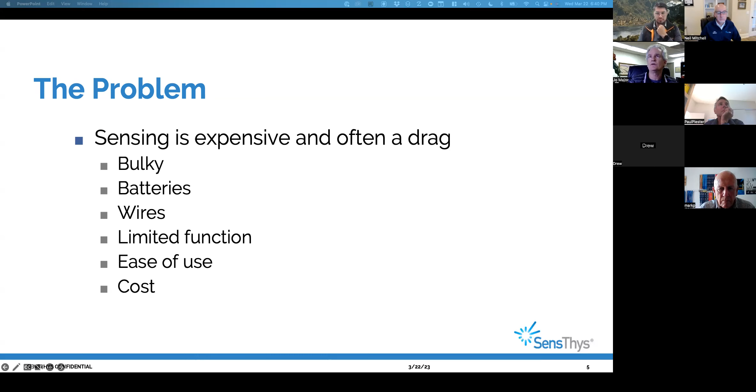So, if you paint the picture of an ideal sensor, what would it look like? A bunch of us are familiar with RFID, but if you ask what an ideal sensor looks like for these solutions, you'd say: I don't want wires going everywhere, I don't want batteries because they run out and are bulky, I want something very small, ideally so small and ultra thin that I can place it within layers of different materials. I don't want to maintain it, I want to detect it remotely and wirelessly, I want it automated, and I want it to be really economic.

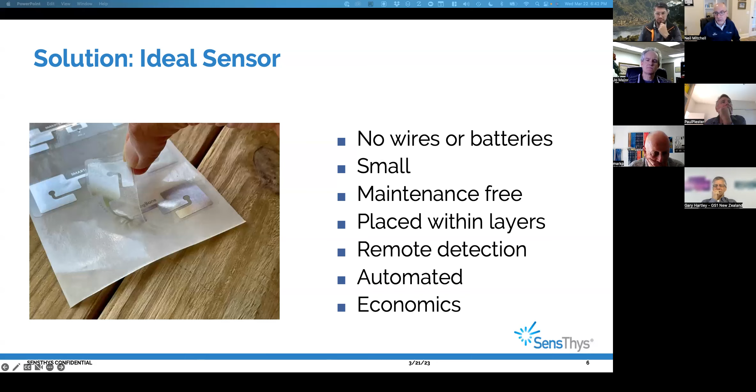I want these sensors to be the opposite of the $1,000 statement that Joe just made, I want it to be a few bucks perhaps. And that's where we are with these types of sensors. You can see an example of one in the image there.

We're going to talk about supply chain, and you may think, why are they pitching us sensors, why do we have to think about the supply chain? The reason is the supply chain is really good at making low-cost RFID tags, but it isn't so good if you say the medium I'm in is a high dielectric constant with a loss tangent of X, and that changes to a different dielectric constant and loss tangent during the process, and I need to operate in that environment. Those kinds of statements are outside of what the industry normally does. When we walk you through this, we'll give you a feeling for how those problems come up and how we help you solve them.

So over to you, Neil.

Let's talk through what one of these sensors looks like and what's constructed within them. The first thing is there's a semiconductor component on there, the IC or the die, there's many different names for it, but this little chip sits in the middle of this RFID structure. It's part of the intelligence that makes up this end solution. There's a lot of smarts in the chip, but also in how this thing is designed and put together. There's multiple antennas attached to this in reality, but as you can see, the chip is really, really small. We'll hold one up here so you can see it. You won't be able to see the chip in it because it's way too small, but this is basically one of the sensors we're talking about.

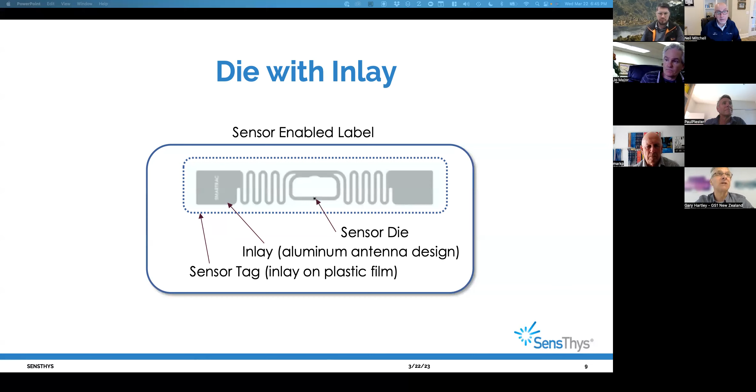Then the next step, after you see the aluminum antenna, is to put it into a label or at least into a protective structure, something you'd apply into your system. Often we're talking about something where you want printing on it, you may want a barcode on it.

You would probably want it in a few layers. Do you want it white? What kind of structure do you want it on? Do you want it rolled or in sheets? Which way do you want it to unwind? There's a whole complicated array of questions that come with how these things are provided. We can certainly help you with that. It's not rocket science, I would like to say, but there's a hell of a lot of details, and we can certainly help you through that.

But in addition to the label you see there on the top left, there are other different formats these tags can come in, these sensors can come in. Another flavor is one designed more for going onto metals. You can see from the look of this one it's a little bit thicker, with some other additional material involved. There are different flavors of that.

If you apply that onto a metal in, say, a vehicle, maybe now we want to get moisture wicked to it or transported to it, so this RFID sensor can do its thing. So now you're talking about attaching a wick tail in order to draw water towards it. Again, that's something we've been involved in, defining what that wick looks like.

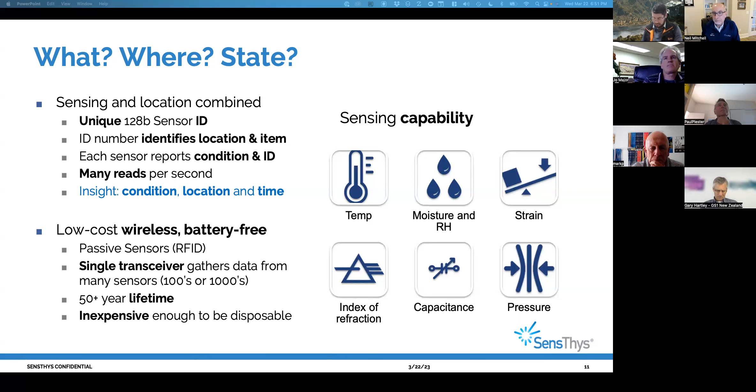We don't need to do that. Basically, you can put as many of these things in and you can read 100, 1,000, or 10,000 of them.

So it's important that we understand with our customers, or help our customers understand how to think about this capability. We've worked with Asygn in particular very closely to help customers understand where things are and what is required to go from where that is into a full application.

Axzon has been around for much longer. They do have things in production, which means we can get you tags and they're reasonably priced and they work - temperature, moisture, and strain sensors. If the inlay of one of those doesn't work in the application, which happens fairly often, then we have to go back to stage number 4 and make a proto label, then make the samples and get into production.

Asygn is a younger company, very, very capable, a lot of fun to work with, much broader. The physics of the device gives them more opportunities to sense different things. So you can read that list. Temperature tags are in pretty good shape - you can buy them, they're entering prime time.

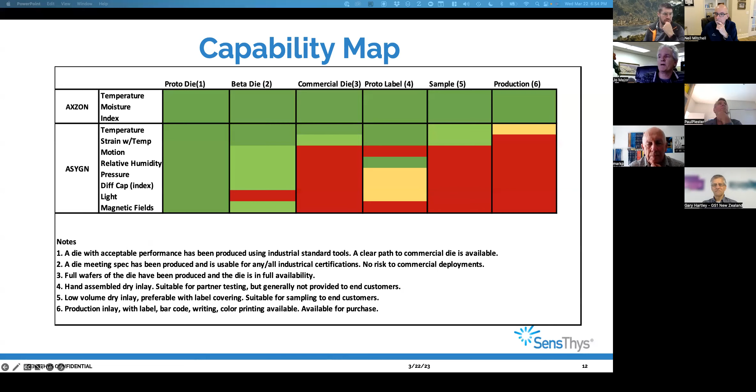So on the software side, Neil's going to speak about PhySens. That's the sensor program that we use for sensors, but there's a series of applications that come with the hardware that you buy. ProSense is a broad-featured reader management tool. PhySens is really dedicated to sensors. It can do all kinds of brilliant things, like it can actually figure out whose sensor it is and what kind of sensor it is and do all the calibration for it.

It's great. A command center probably doesn't interest anybody here - that's if you have 75 readers in a facility and you want to manage them from a single point. AutoSense is a very nice automated reader management tool - you basically tell the reader what to do when it wakes up and goes to work. I'm not going to spend a whole lot of time on performance or the SDKs.

You can always call us about those things. We've always taken security very seriously, and we're not going to talk about it, but it's pretty easy to show that these readers, we think, are the most secure readers that you can buy on the planet. I'll turn it over to Neil next to talk about PhySens.

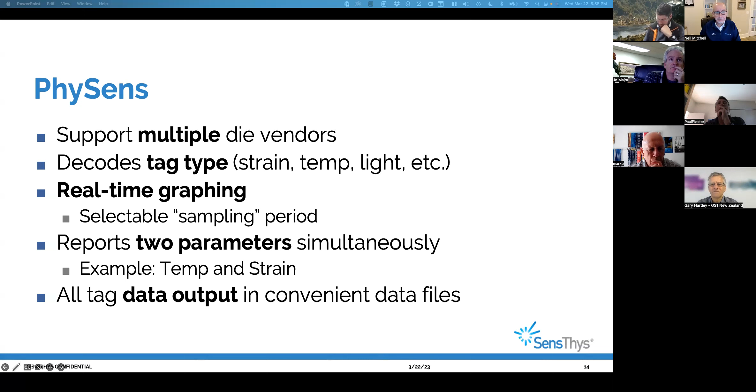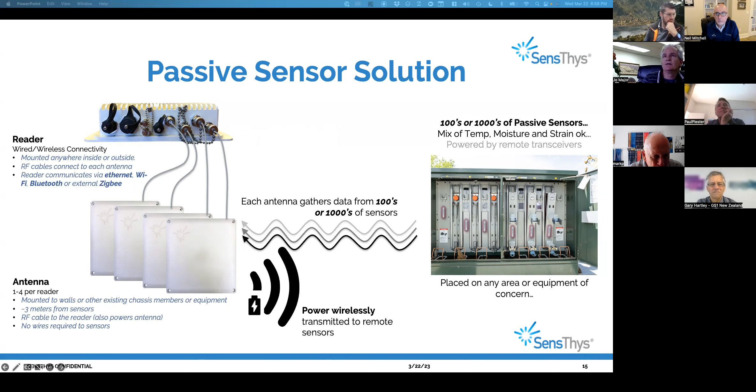So I think next. So, yeah, what we're going to do now, these are literally just 1 minute videos each, and we've got a couple of them. This one here is SensThys in operation, and we're actually going to run it and show you what happens as we measure water and heat.

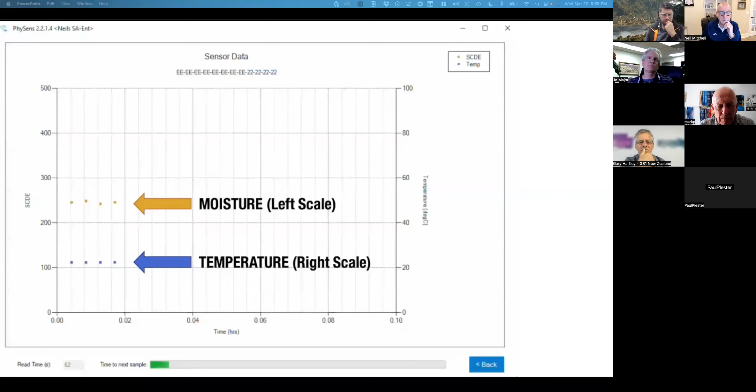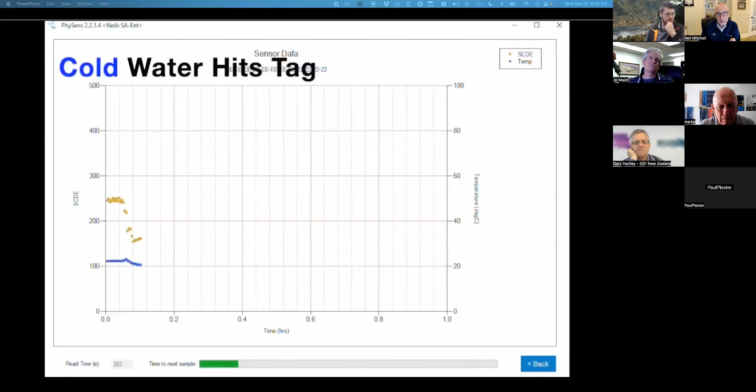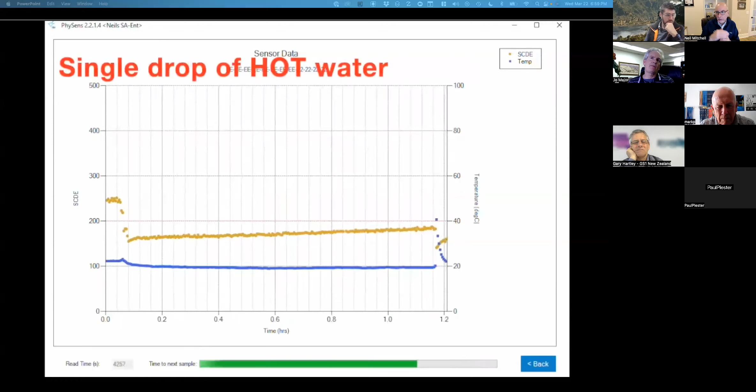So at the top we have in orange the moisture reading, and then the blue is temperature. Every 15 seconds in this case we're reading. And then something's happened there, moisture has been detected. This tool basically resizes the chart for you. So now we're starting to see a very slow increase in that moisture level, and then all of a sudden it's going down again, and something's happened to the temperature.

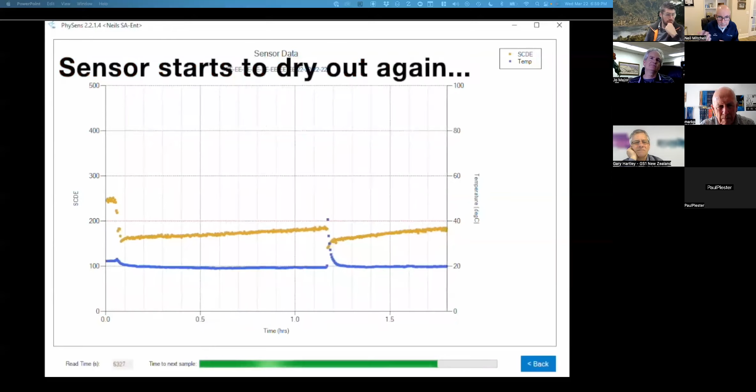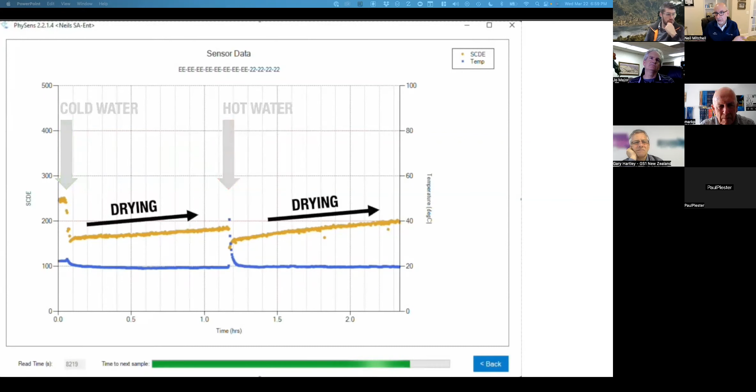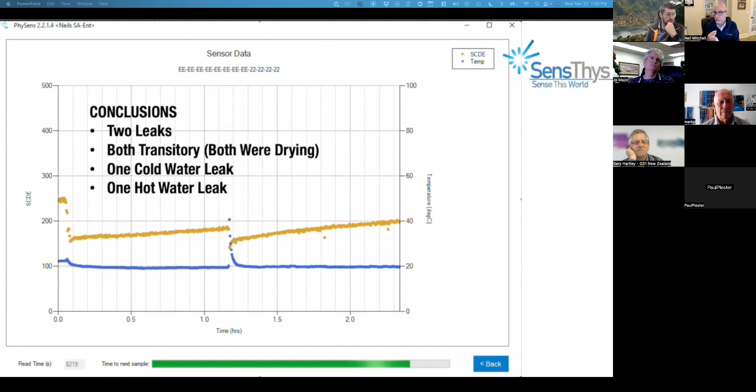It's gone, you see the blue line there, it's gone from 20 centigrade to 40 odd centigrade there. So you can see there what's happened: one drop of cold water, one drop of hot water landed on these things. They were drying out. You can see the temperature of that water. You can see when it happened. So all of a sudden, you know immediately from looking at this data, there were 2 leaks. They were both transitory. One was a cold water drop, one was a hot water drop. You know that all just from that information already.

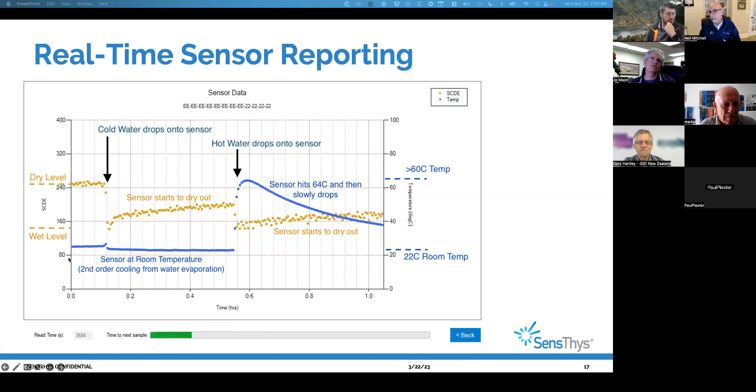So this is another view of it. This is one we captured earlier and annotated to make it a little bit easier to see. We'll give you access to this presentation material so you can see it afterwards. I won't go through the whole thing because it's basically what you just saw. But you can see here the dry level, the wet level, the difference here, and the big spike in temperature here. That's pretty much what you just saw. On the right-hand side here we have the temperature in centigrade, and then on the left side there's basically a special code value representative of the other thing you're measuring.

And then one more we'll show here, which is the strain. So here I'm basically taking one of the strain tags, I put it on the business card, and I'm bending the business card in 2 different dimensions and at 2 different extremes.

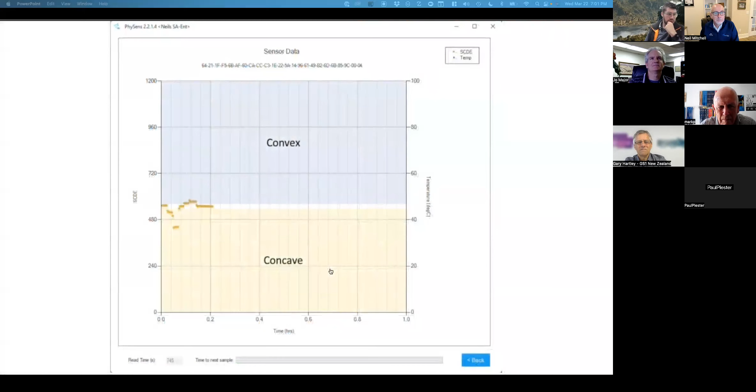One comment on that particular video, that was actually done with an uncalibrated early prototype. So what you'll see is that those things can be made more extreme. You'll see that a little bit better in future, or you will now.

One comment about the strain tag, we were having a lot of fun with that strain tag. Of course, that strain tag, when you put it into its application, fails, and it has to be adapted to work in the real world. Okay, we're going to show you, this will explain itself. I'll talk as it goes. Hit it, Neil.

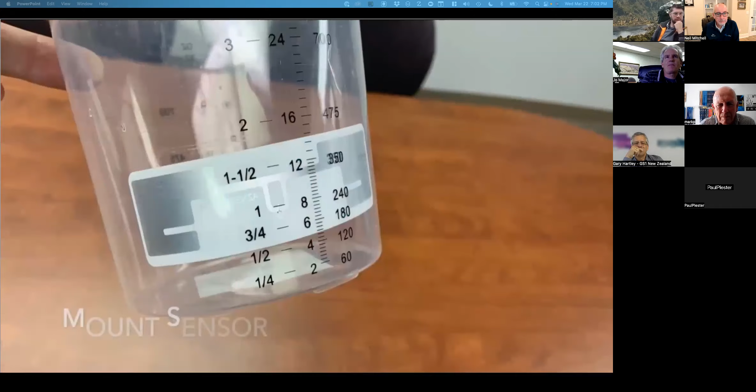So there's a sensor in a simple plastic cup. The reader here, I don't know how far away it is, probably 3 meters away.

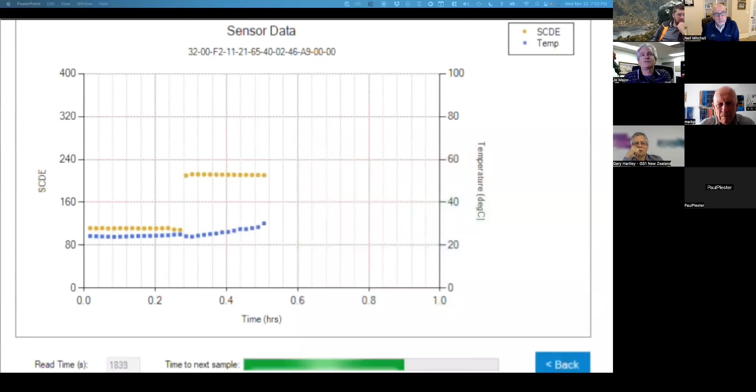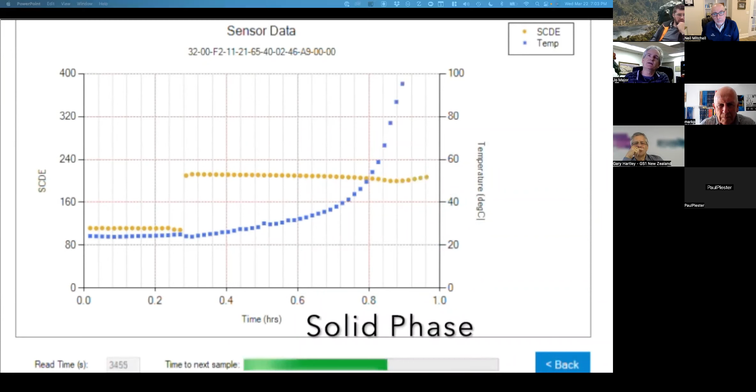There's the baseline. We're going to add epoxy and directly measure how exothermic it is, and directly measure when it flips from the liquid state of cure to the solid state of cure. And as time goes along, the point where it flips to solid becomes very clear.

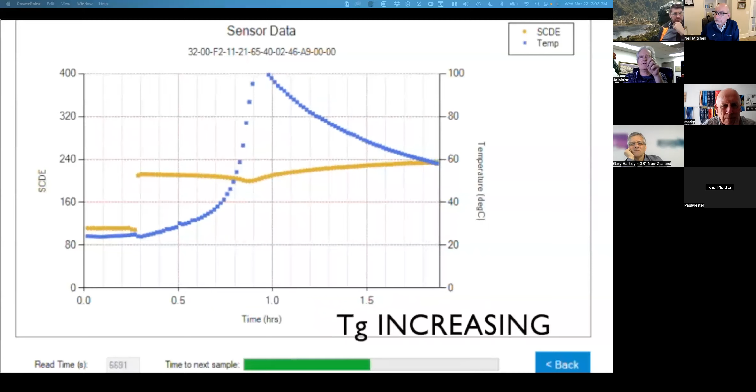The chemistry of epoxy was first really mapped with interdigitated capacitance sensors in the 60s and 70s, and this is in effect mimicking that. Instead of having wires and a lot of bizarre stuff, it does it at a very low cost point.

But it actually tracks the flipping of this - if you've worked with epoxies, they're sort of like honey, real thick and viscous. Then all of a sudden they kind of get hard. That's the part where it gets hard, that's flipping into the solid state phase of cure.

We also track the max temp and when the max temp occurs. If we're doing that for epoxies, just looking at raw chemistries, we can actually see differences between various epoxies, and we can detect incorrect epoxy mix ratios. Finally, as that orange trace goes up, you can estimate how far along it is in its cure process.

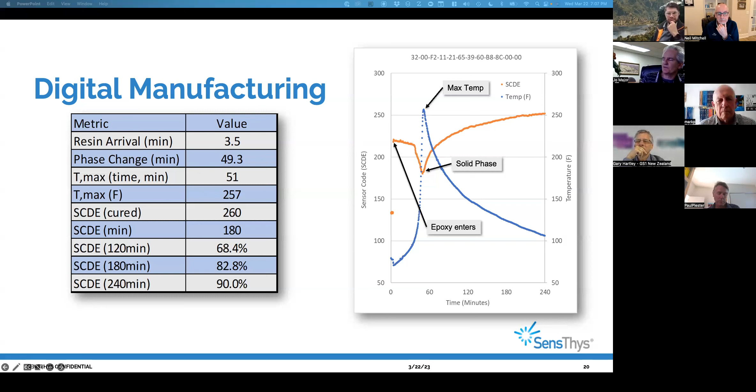Next, we're going to whiz through some of these, but we just wanted to give you a little taste of some of the varied applications that we're seeing with some of these passive sensors.

Basically, these passive sensors are actually buried inside of these layers of the gypsum material. We're able to just take this cart, move it over the roof, and this particular reader has GPS built into it, so we basically end up with a moisture map of the building, of the roof.

And in this testing that we did at a company in the south here in the States, we actually found 3 leaks in their roof they didn't even know about.

In an effort to go faster, machinery needs to make sure it doesn't get too hot, and if it's getting too hot, you want to turn it off before it does any damage. There's a lot of different applications for that. You can imagine these things can look at a lot of different tools in an area all at the same time. It's a pretty neat application.

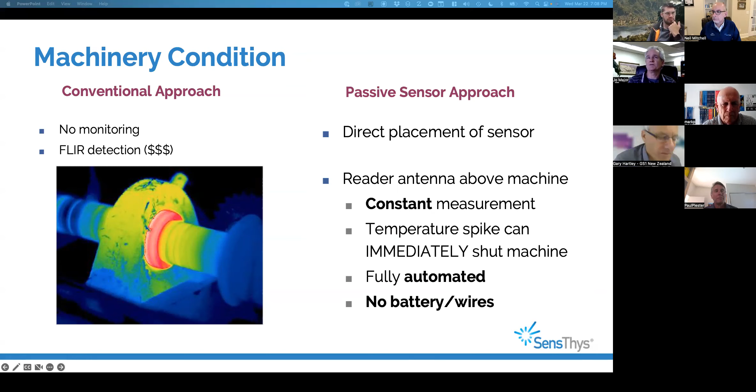Next, a good use for ceramic tags, one we touched on before so I won't go through all the gory details, is automotive manufacturing, where it's a huge cost if a car goes out with a leak in it. If your name's Audi or Ford, it doesn't really matter. If you manage to anger a customer, they won't come back to you. So it's not just several thousands of dollars of repair, it's that reputation loss as well.

We've been involved with some companies doing high pressure water testing of the vehicle during manufacturing, on the production line. We've developed iOS and Android software that does a before and after comparison, so they can test these tags placed into the vehicle, some with wicks, some without. It's tested dry before it goes through the spraying machines that spray the vehicles, comes out the other end, you retest it, you get a red or green light depending on if there's water there. Simple as that.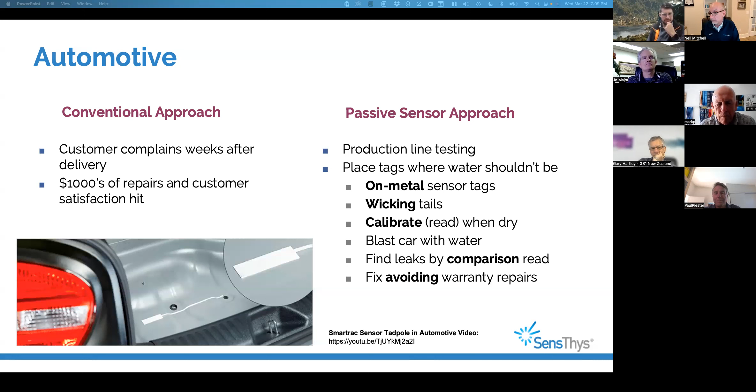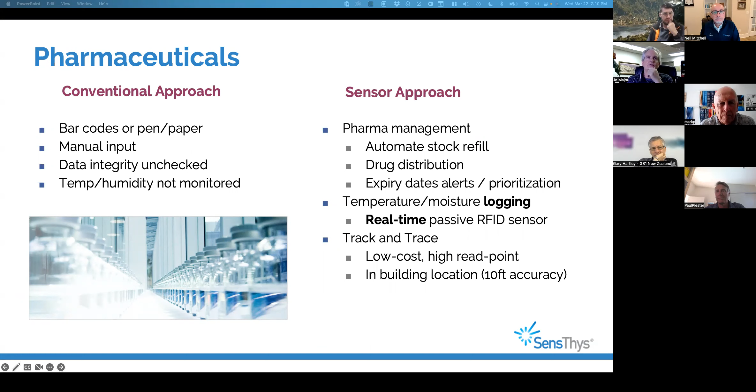In pharmaceuticals, there are lots of applications. I think at this point it probably serves us well to open it up for questions because we're running a little bit late. Let's skip this one.

I'll briefly go through this. We have not had a successful— I shouldn't say that. We have had one customer that with very little coaching got up and running and reading some good stuff. And we are proud to say they are Kiwis. But generally speaking, we've only been able to get things running smoothly when we go visit.

That's typically because it's a ton of material science to weed through. What material do you have? What are you trying to see? The environment can corrupt sensor data, and we can help minimize the corruption. We also have methods of finding it and getting it out so that even fairly corrupt data can be made usable. It's non-trivial to optimize a reader for sensors. If you read an RFID tag, you declare victory. With a sensor tag, if it has too little power, if it has too much power, if it's too close to noise, all of those things give you crap, and it's sometimes fairly difficult to figure that out.